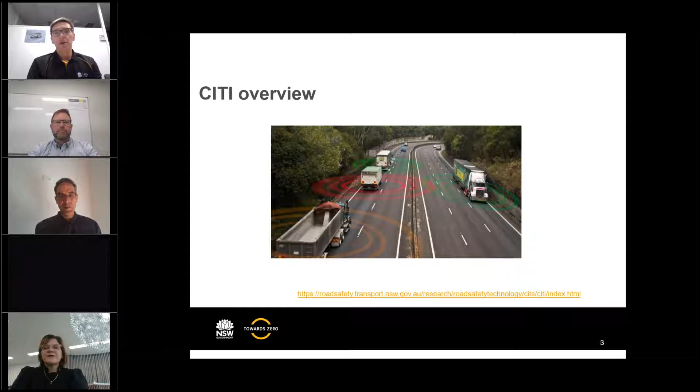I'll just have a short video to play which will give everybody a bit of a high level introduction to CITI. So if you just play that video, please, Susie.

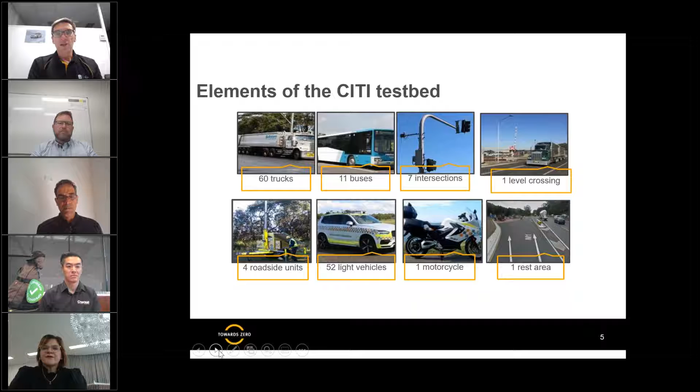So if we just go to the next slide, thanks. I don't want to get too technical with everyone, I'm not sure what the audience is. I've been caught out with this before, so I'll just talk through some pictures of our technology.

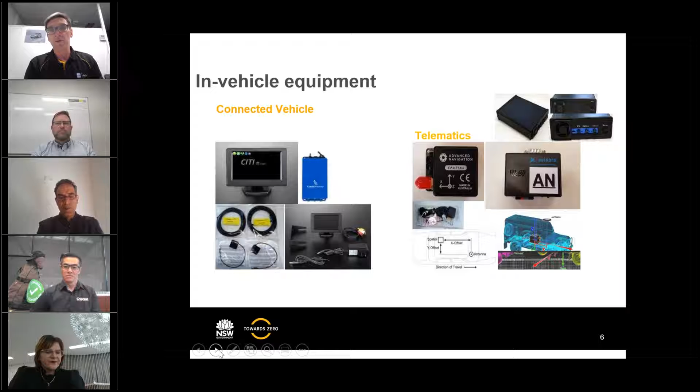It's fairly straightforward. We've fitted our connected vehicles with a display so drivers can see the connection and interact with the system. There's substantial equipment relating to the Cohda wireless system, antennas and whatnot for our DSRC. On the right is our telematics kit, which has a trick to its positioning, particularly the accelerometer - it has to be positioned quite centrally in the vehicle so we get accurate acceleration readings, which all feeds into the data we're capturing to enable accurate insights into the research outcomes of the project.

There are also two other warnings: red light ahead, and level crossing warning, which I'll get into more detail on as we go along. Next slide please.

We take a spur off that along Picton Road, which takes us down to the ports area in Wollongong. For our research purposes it's very interesting because we've got regular heavy vehicle usage, and some of the companies we're working with traverse that route, which is important for our research. Picton Road is a major freight artery linking the inland parts of New South Wales to the coast.

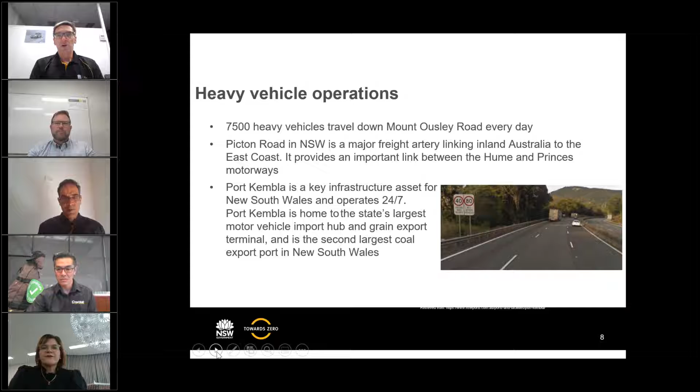Next slide please. I talked before about an additional road rail level crossing. In the CITI project we're really excited about this because it's an area we've been looking to gain more insights on. We currently have a connected level crossing in the port area, which is more limited-access, and we've used that as a proof of concept to prove the technology works - and it does.

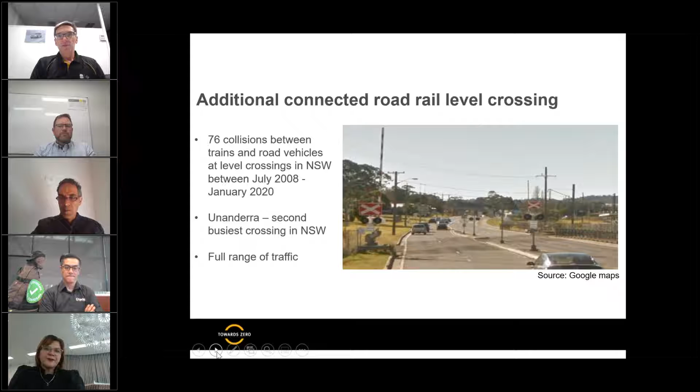Now we're in the active process of going out into the real road network, to a location which is the second busiest crossing in New South Wales for train crossings and actuations. There's a history of road safety issues at the location, and the exciting thing for us is that having proved the concept, we're now going to apply that technology in the real world with all sorts of vehicle classes - cars, heavy vehicles, predominantly buses - and we're really interested to see what learnings we get out of that and how drivers interact when they see the level crossing change status.

So if you just go to the next slide, please.

So some of the advantages of our test bed: it's a safe, mature and well-maintained test bed. We've been in operation since 2014, moving through different phases of projects and continuously improving and upgrading our infrastructure.

It's home to Port Kembla, which is a major attraction particularly for the heavy vehicle clientele we have. One of the great things about Wollongong is there's a lot less congestion than on the Sydney road network, so conducting trials in the Wollongong area is a lot safer. You still get the same classifications and classes of vehicles, but without the congestion problems and restraints you have in the greater Sydney area.

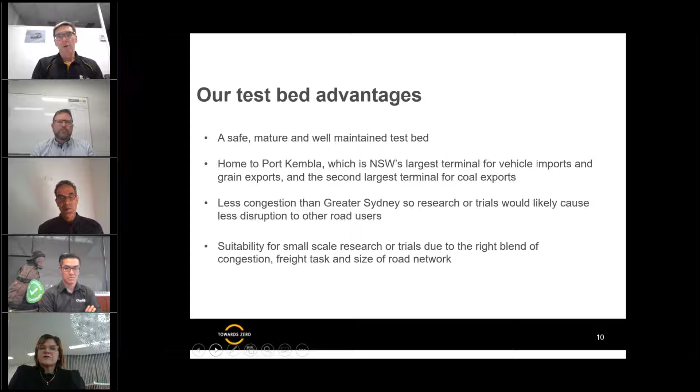As I said, it's a reasonably big test bed in some ways but small in others. We have the capability to conduct small scale trials and research, with the right blend of freight task and the size of the road network. So let's go to the next slide, please.

Last but not least, calling out some of our local suppliers, Bucklands, who've done great auto electrical work and vehicle maintenance for our connected fleet. Just go to the next slide, please.

Bearing in mind time, I'd like to share a little area we're starting to work into at the moment to evaluate. Basically we're looking at improving our accuracy for our CITI fleet. It's quite innovative in that we're connecting into an existing connected surveying network where surveyors shoot their measurements around and connect and measure. So in New South Wales we have measuring stations in our test bed.

We've been able to interface our CITI system in with that test bed, and we're starting to see some really interesting improvements in terms of location, being able to locate vehicles. Without using this technology, it was down to about 160 centimetres. With this technology, we're starting to understand we can get down to less than 3 centimetres. That's really exciting because like all test bed operators and anyone using GPS, you want full confidence about where the vehicle is in relation to the road network.

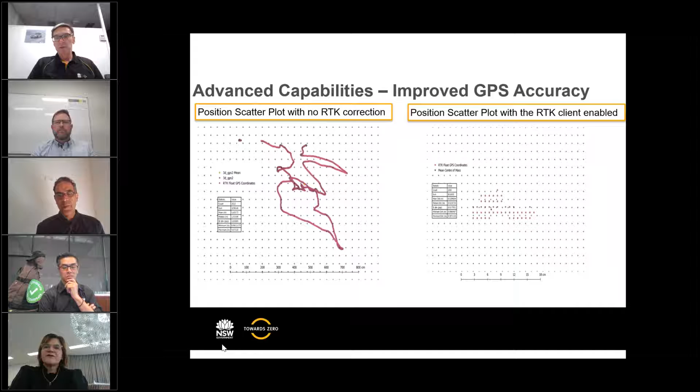So we're still actually working on that at the moment, and it's looking really promising. We're continuing to progress some of these niche business cases to get more out of the test bed. So this is the last slide.

Pretty much that's it from me. We're always looking for input from our community, we'd love more heavy vehicles in our trial, and we can be contacted. I can be contacted either via Rita or ADVI, or I've got some details I'm happy to forward to anyone else if they'd like. So once again, thank you for allowing me to present to the community, and I'm looking forward to the next presentations. Thank you.

Thanks, Tam. Thanks very much for that. Mount Ousley is infamous for that steep descent and the amount of heavy vehicles, so that's great to hear about the project. And then the next stages, railway level crossings are one of those safety issues as well, and heavy vehicles and railway level crossings are really important for the way we move freight and goods around Australia. So thank you for that.

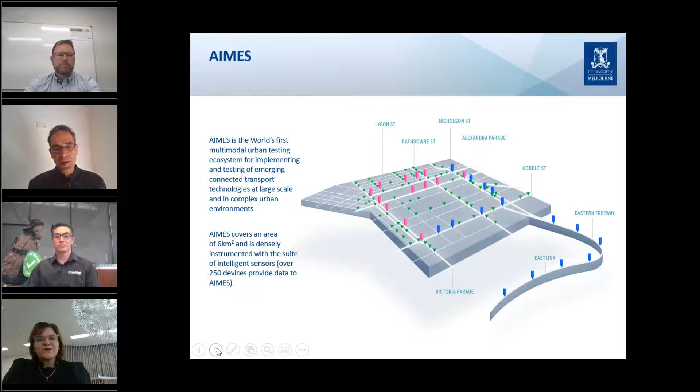As AIMES, we focus on functionality rather than particular challenges, even though we have carried out several projects in the past. The whole idea of AIMES is: if you have an ecosystem, if you have connectivity between different modes, if you can retrofit the existing infrastructure to become better, smarter, then what potential solutions can you bring in. That was the philosophy behind AIMES as an ecosystem.

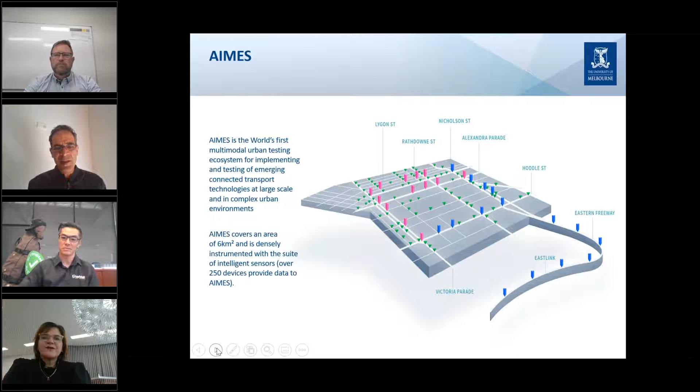Why did we decide on this area? I think this is a perfect storm. If you're familiar with Melbourne, in this area we have a significant amount of cycling and walking to work.

So we have active mode, we have people using e-scooters, we have heavy city logistics, we have massive freight movement from east to west and vice versa as a significant corridor. We have trams and also lots of buses moving around. So it's a very complex environment.

We have a very legacy system, SCATS. So what are we going to do with that, when you put different types of sensors delivering different sorts of outcomes? How could you bring them all together in order to look at the transport system you would like to have in future?

Connectivity and automation, all of this is in our horizon. But at the same time, we would like to apply some of the findings that can address some of the challenges we have today, such as how you could look at one intersection and provide, for example, priority to public transport, while also improving safety for people walking or cycling at that intersection. That was the sort of challenge we put for ourselves.

From the first day, using the real world environment, so you can learn as you go forward.

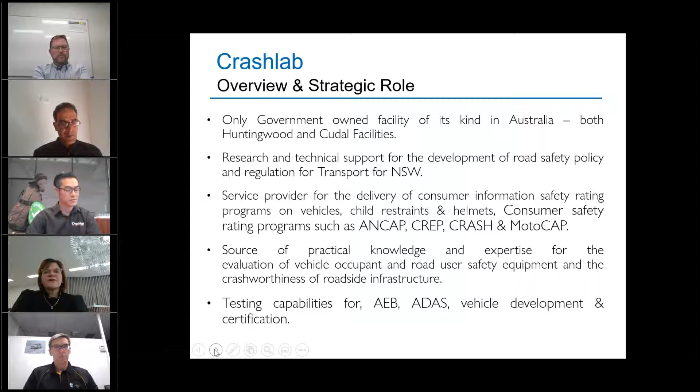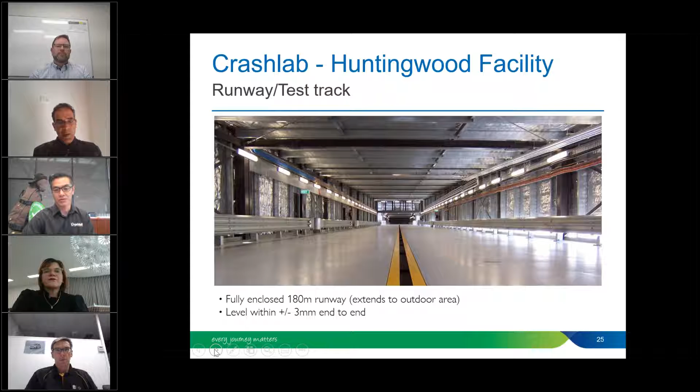Just a few slides about the Huntingwood facility: we've got a fully enclosed runway, about 180 meters long, which also extends out to another outdoor area. This area goes for another 200 meters, 100 meters wide. This is where we conduct a lot of our outdoor testing, whether it be roadside products or other infrastructure testing.

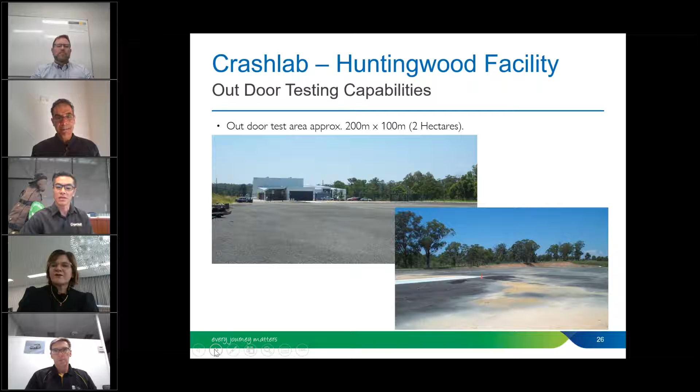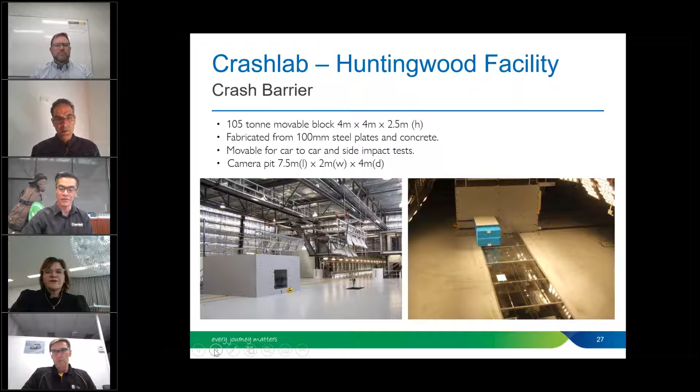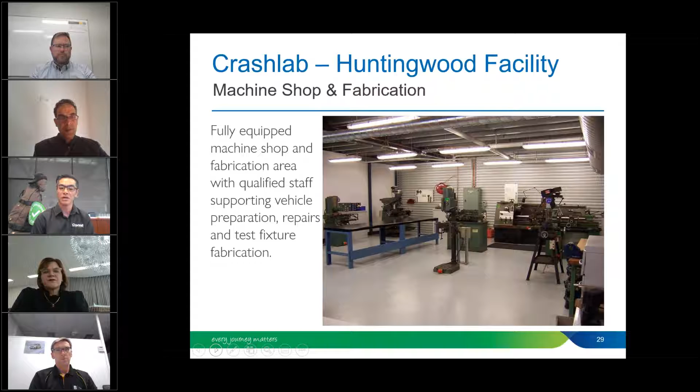We have a fully equipped workshop fabrication area. We've got a list of qualified staff who are on hand ready to support any fixtures we may need to fabricate for any research or one-off projects that we quite often get here as well. And the team here are very, very capable and well equipped in making all sorts of adaptations to satisfy testing needs.

One of the key areas in the Crashlab facility is the vehicle measurement room. It is a 24-hour conditioned room. The reason for this is to maintain a conditioned environment so that test vehicles and in particular test dummies are soaked in an environment to maintain a stable condition. Part of this is also we test to international protocols, and it is expected that the conditions we're testing to are repeatable and comparable to overseas labs. As you can imagine, Australia has quite different environments to the rest of the world, and the only way we can make sure that our data and results are transparent is to make sure that the testing environment is also consistent throughout the test labs.

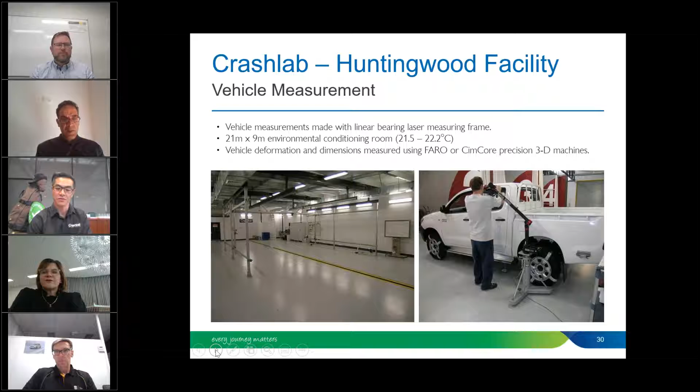We have vehicle measurement systems such as the CimCore and the Faro, which are very highly sophisticated 3D measurement machines. We use them to measure vehicle deformation, dummy positions, which is all very critical in the analysis of test results.

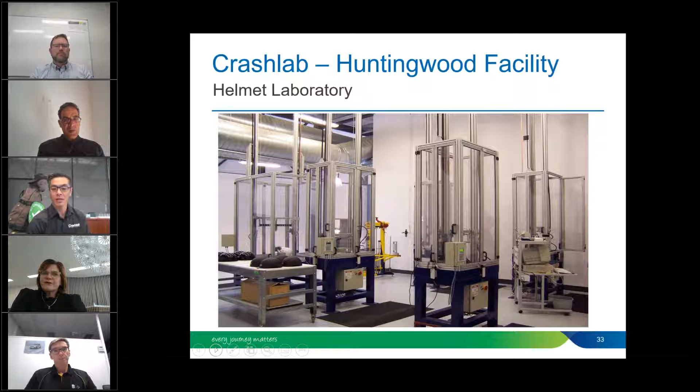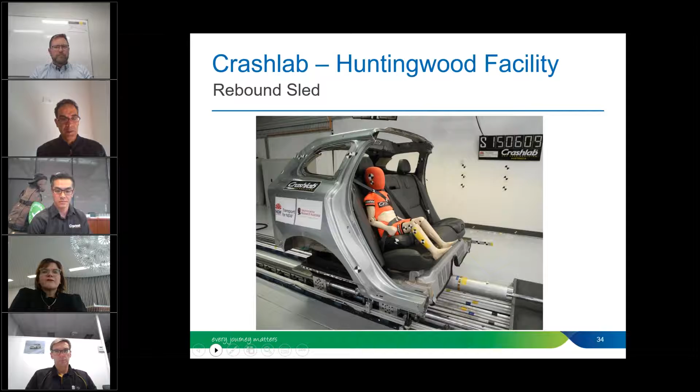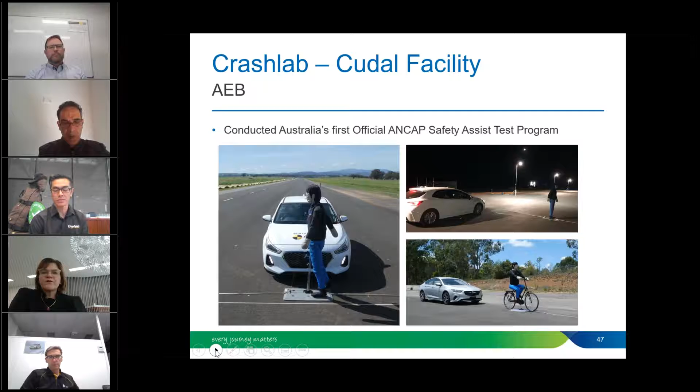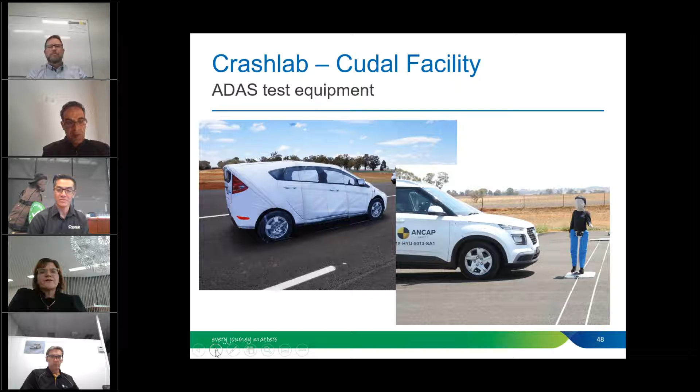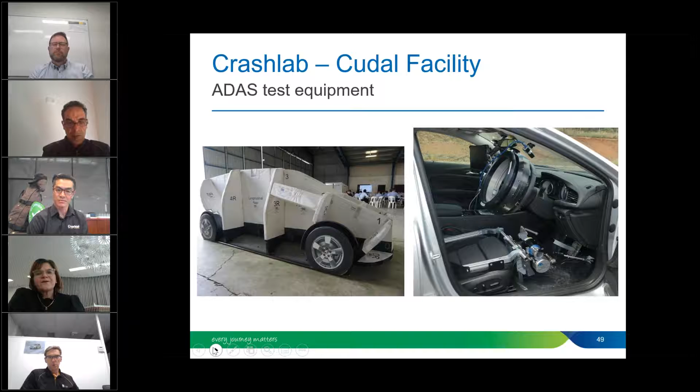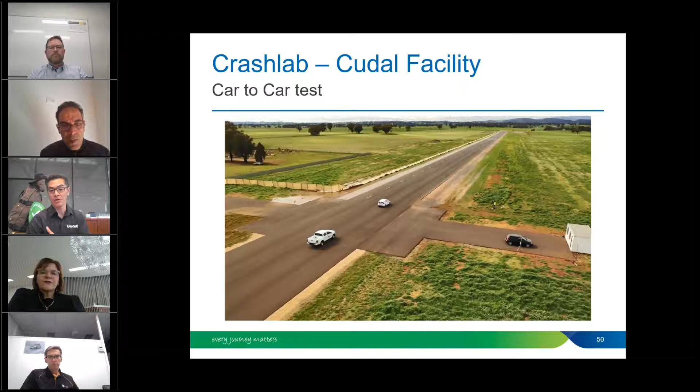This video here is of official ANCAP testing that was recently completed, which also saw the Isuzu D-Max get awarded the highest ANCAP rating of 5 stars. I believe it was the very first commercial ute in Australia to be awarded 5 stars in this space. So it was a very good achievement for both Isuzu and for Crash Lab to be part of this. Next.

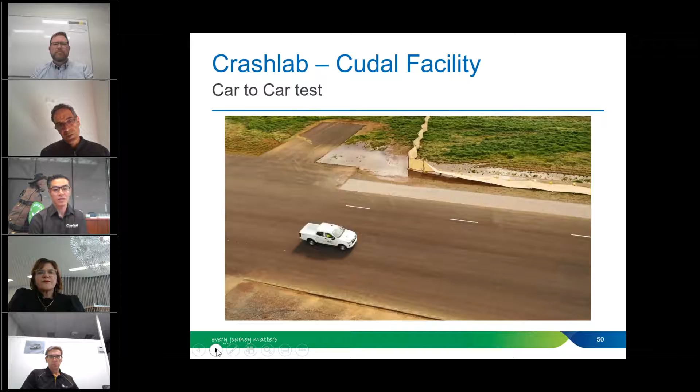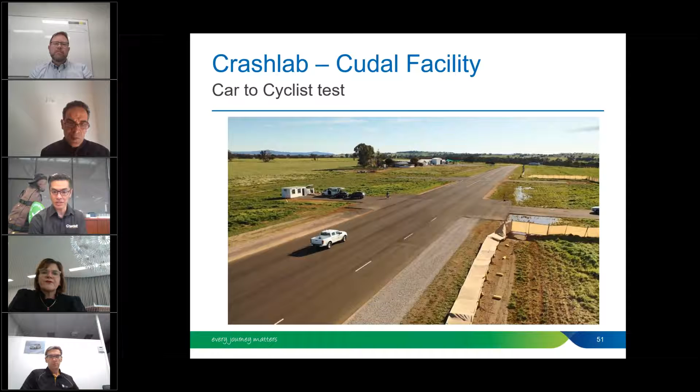That test there again was just a car following another vehicle, and as you did see, it stopped. This one would be a vehicle approaching a cyclist. It's a bit glitchy, sorry about that. As you can see, the cyclist decides to cross the road, and the vehicle stopped without impacting it. Similarly here, an adult crossing the road, and again the vehicle stopped. It looks like the videos aren't buffering too well on my end, so I apologise, but I think everybody gets the picture. Just trying to demonstrate the facility and the equipment.

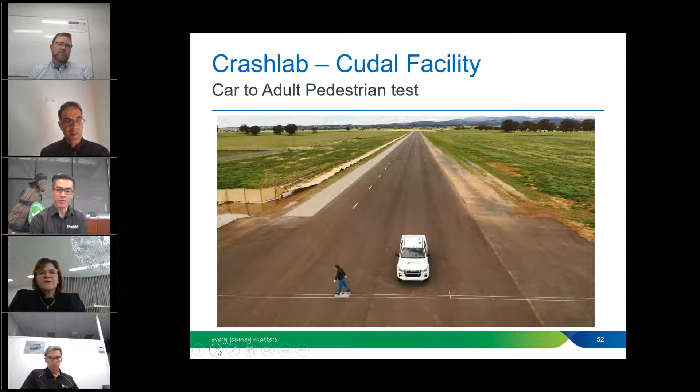So we can move on from that. I'm just mindful of time as well, sorry.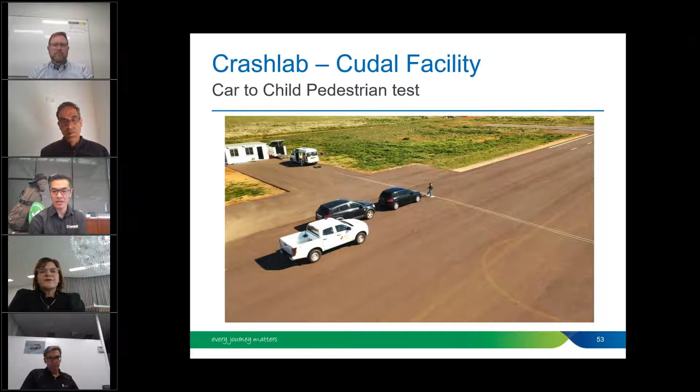Another scenario: a child ducking out in front of a couple of parked cars, which happens more often than we'd like. The vehicle pulled up and did not impact the child. This is one of the trickier tests to pass, and there's a nighttime component as well, both with street lights and without.

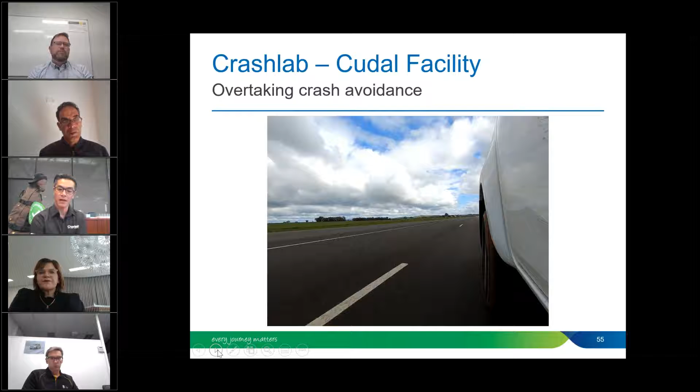This scenario involves changing lanes when a vehicle is coming up in your blind spot. The vehicle uses blind spot monitoring to detect the oncoming vehicle and correct itself, avoiding a collision. This is made possible through GPS and robotics on the car, relying on the vehicle's actual technology to perform this way, and that is what we are assessing.

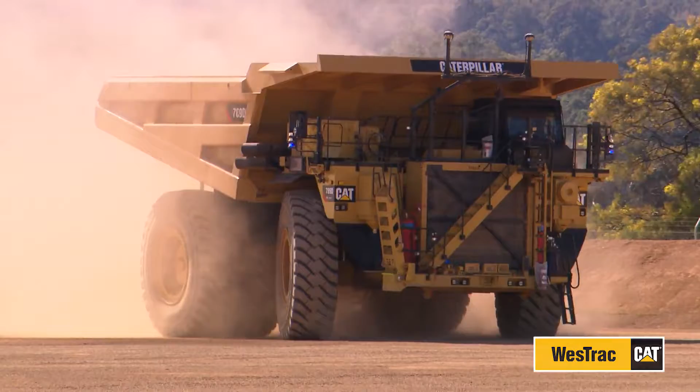The WesTrac Technology Training Centre is an absolutely unique facility. It is the only Caterpillar autonomous training facility outside of North America.

Kids from today are good with technology, aren't you? You probably operate from your iPad, hey? You drive that with your iPad? Maybe.

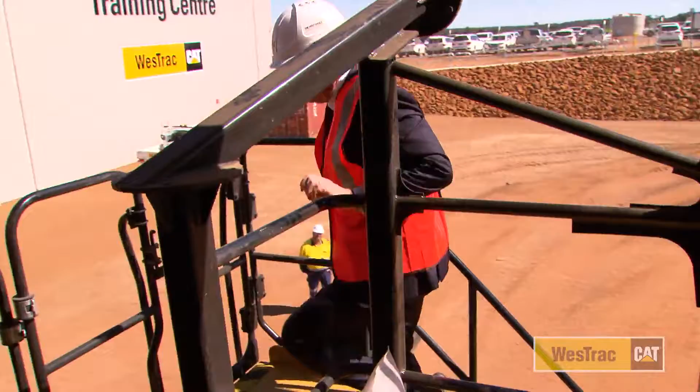I expect that in the next couple of years we'll see rapid growth here where we accommodate more than trucks, more than shovels, where we get to a whole-of-mine solution being taught here. This training facility right here in Collie is able to be used by locals and people across the state alike. It's one of those projects that will secure the long-term future of a great town. We are hoping we will be able to expand this facility as we see further technology advancements in the resources sector. This ensures we not only grow the skills for today, but also the skills for the future. At WesTrac, we're really proud of the history we've had training many people here in the state.

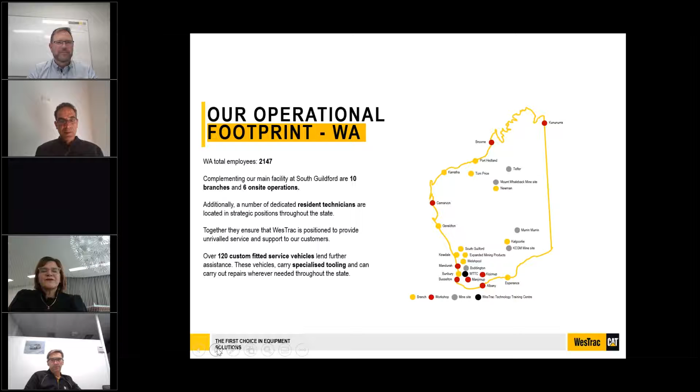So from an autonomous point of view, to paint a picture, we've just clicked over 305 autonomous haul trucks in Western Australia. It's a significant amount of haul trucks converted to autonomous, and the majority are 793 size, so 240 tonne class haul trucks. We have some larger ultra class and a few smaller 789 Cat equipment. We've implemented this, and we're the biggest user of autonomous haulage in the world in Western Australia.

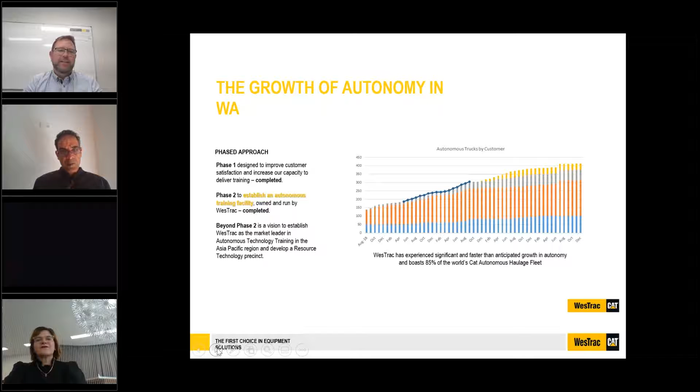The reason the Collie facility came about was that we have the lion's share of autonomous vehicles in the world for Caterpillar. What we needed to support that, equally as first class as our product is, Cat Command for hauling, is a facility to train our maintenance technicians to properly support autonomous haulage in Western Australia.

The issue is compounded by the fact that the equipment we use and the areas we operate in involve a lot of money and resource to put people on site for training. Pulling haul trucks out of a production cycle when some are hauling 240 tonnes and doing a cycle every 15-20 minutes, and with iron ore prices at $120 a tonne, you start clocking up costs pretty quickly. So one of the key areas we needed was a controlled, safe and effective environment to train our maintenance technicians - not only WesTrac technicians, but our clients' technicians as well.

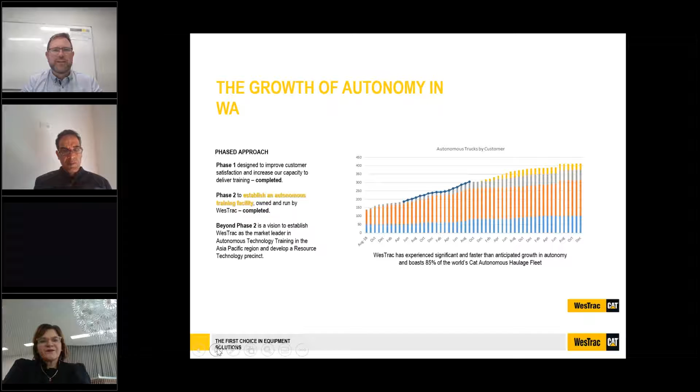That really led to WesTrac making a significant capital investment in the Collie facility in January this year. We started construction at the end of January and did the official opening in June, which is the video you just saw.

It was a project partially funded through the Royalties for Regions program and funding from the Collie Future Development Fund, so we had a lot of buy-in from the West Australian government. We partnered with a good customer of WesTrac, Piacentini and Sons Earthmoving, who operate a lot down in the southwest. The three of us constructed the facility in a very short period of time, so kudos to all involved.

The interesting thing with construction is that with an autonomous vehicle in a mining type environment, it doesn't matter whether it's 1 truck or 50 trucks and associated equipment - you still need the same amount of infrastructure and rigor around support for the facility.

At the moment we have one 789 dump truck and one site-aware Hilux light vehicle in the area, and we're hoping to expand on that shortly. We're currently upskilling a lot of WesTrac employees, getting them up to the standard we're looking for from a maintenance application perspective. We're also in talks with a number of parties on what we may be able to do at the Collie facility in the future.

We've got a lot of interest in the facility. Collie is a coal mining town by nature, and it's very accessible to most people in Western Australia.